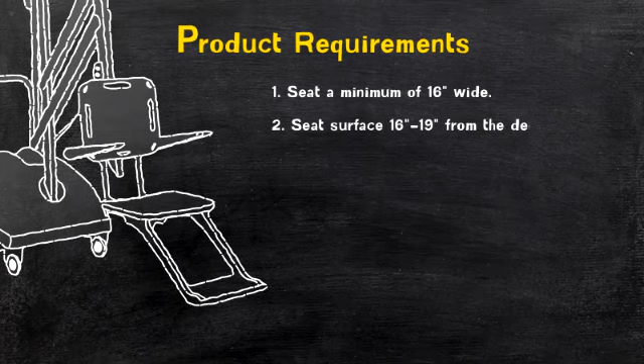Let's look at these requirements a little closer. First, there are the product or P requirements. The seat must be a minimum of 16 inches wide. The seat surface must be between 16 inches and 19 inches from the deck surface. Footrests are required and must move with the seat.

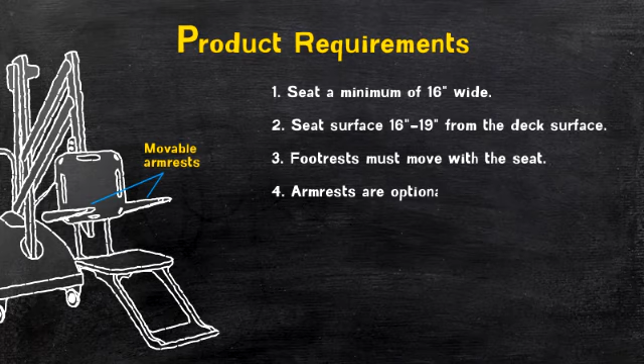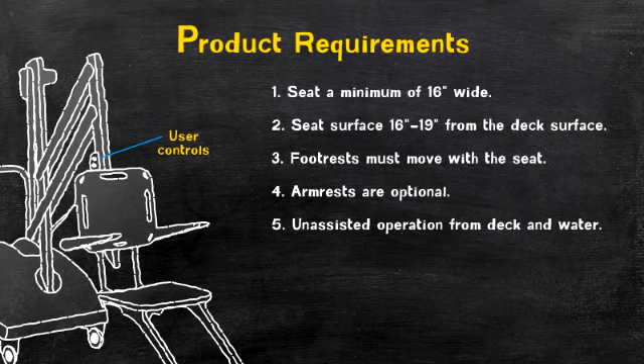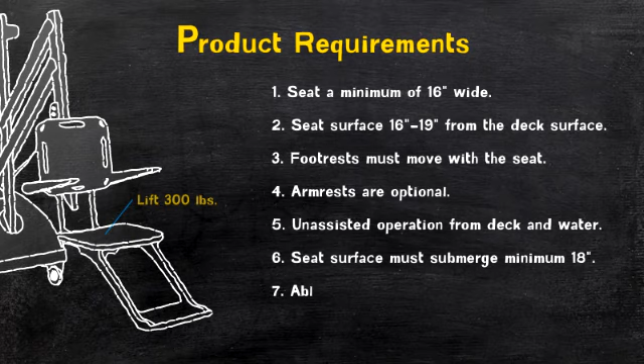Armrests are not required, but if used, the armrest opposite the water must be removed or fold clear of the seat. User controls must allow for unassisted operation from both the deck and water levels. The seat surface must be able to be submerged a minimum of 18 inches below the water line. And the lift must be able to lift 300 pounds. All of these items are required in order to conform to the ADA product design guidelines. But remember, product conformance is only half the equation.

The other half of the equation is I, which represents the installation elements required by ADA. These installation requirements have two parts. First is a scoping requirement that defines a pool's means of access requirements. Pools with less than 300 linear feet of pool wall are required to provide one means of access, and that means can be either a pool lift or a ramp. Larger pools, more than 300 linear feet, are required to provide two means of access.

Second are the application requirements, which define placement and accessibility. These requirements are a major predictor of compliance and an area that is often overlooked. Because each pool is unique, close attention must be paid to placement in order to ensure the product's accessibility. In this area, ADA states that pool lifts shall be located where the water level does not exceed 48 inches. In the raised position, the center line of the seat shall be located over the deck and a minimum of 16 inches back from the pool's edge.

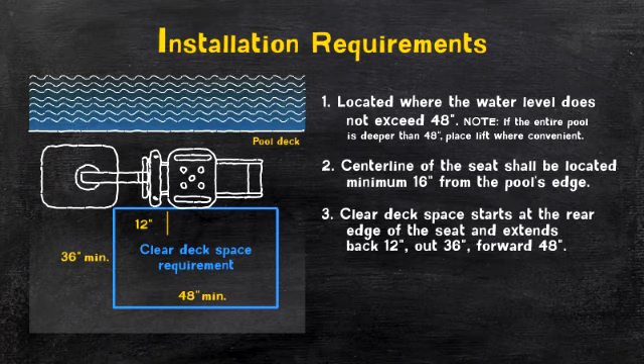Additionally, clear deck space shall be provided parallel with the seat. This clear space starts at the rear edge of the seat opposite the pool and extends back 12 inches, out 36 inches, and forward 48 inches. Now that we understand both elements of our equation, let's take a look at a few real-world scenarios and solve for C to see if we're compliant.

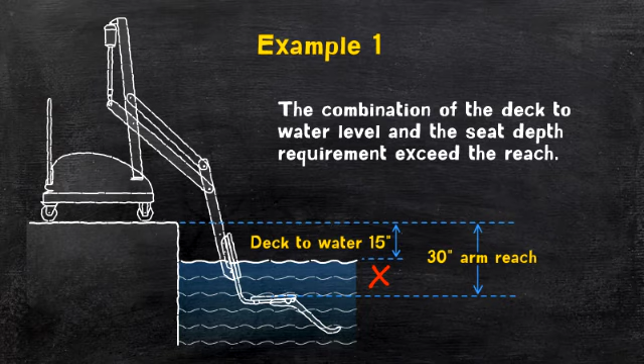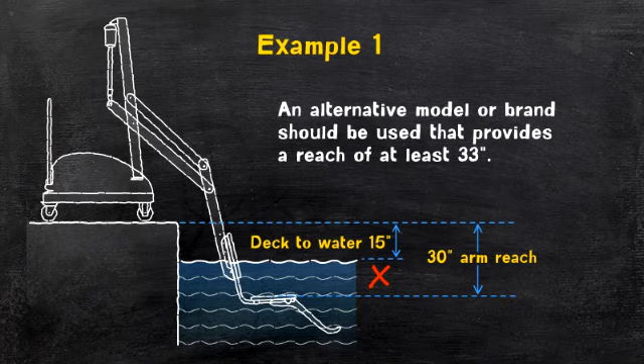Pool lift A has an arm reach of 30 inches. The site has a deck to water level of 15 inches. Can you reach the required submerged depth of 18 inches with pool lift A? If you said no, you're correct. The combination of the deck to water level and the seat depth requirement exceed pool lift A's reach. In short, the arms are too short. In this particular instance, an alternative model or brand should be used that provides a reach of at least 33 inches. This is one example of how site variability can affect compliance. Here's another.

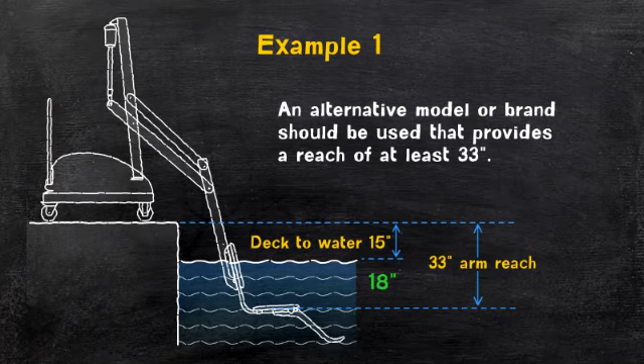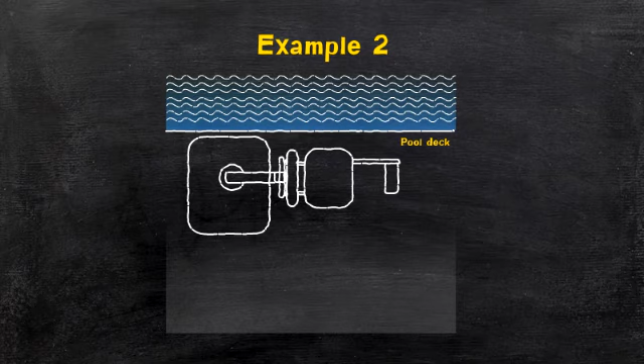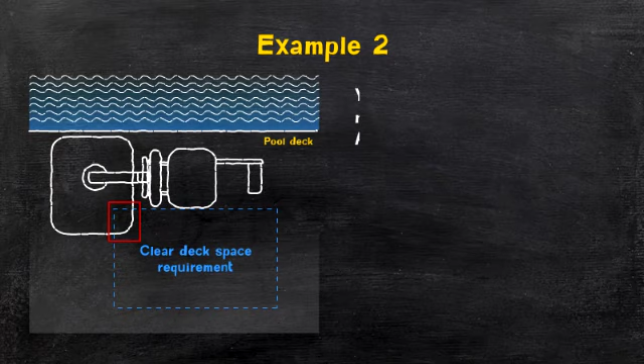Your customer has a pool with less than 300 linear feet of pool wall and requires one means of access. So you choose your favorite brand of lift, identify an area of the pool where the water depth does not exceed 48 inches, and carefully place your lift 16 inches back from the pool's edge to meet the seat centerline requirement. At this point, everything looks good. Next, you check the clear deck space area and discover that a portion of the lift encroaches into this space. What's your next step? If you chose to stop, you're correct. In this particular instance, you should seek an alternative model or brand that meets the ADA installation requirements.

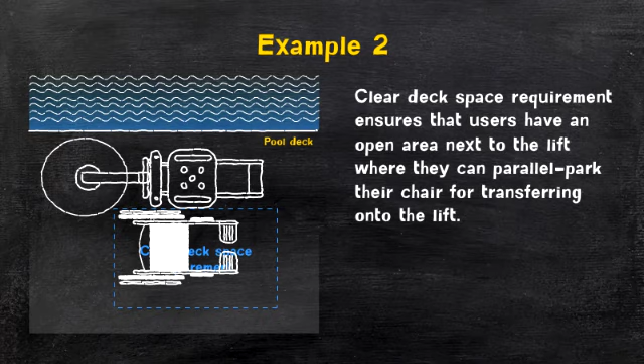The clear deck space requirement is designed to provide an area of unobstructed space starting at the back corner of the seat opposite the pool. This requirement is in place to ensure that the users have an open area next to the lift where they can parallel park their chair when transferring onto the lift. Additionally, this space is important if a user requires transfer assistance. As you can see, the installation requirements can have an adverse impact on compliance even when you use a product that conforms to the ADA product guidelines. Remember, both the product and installation requirements must be met in order to be compliant.

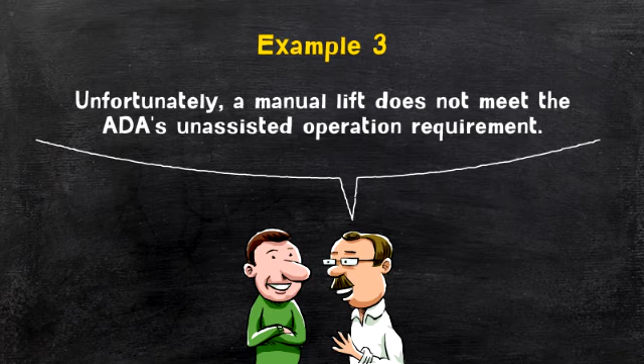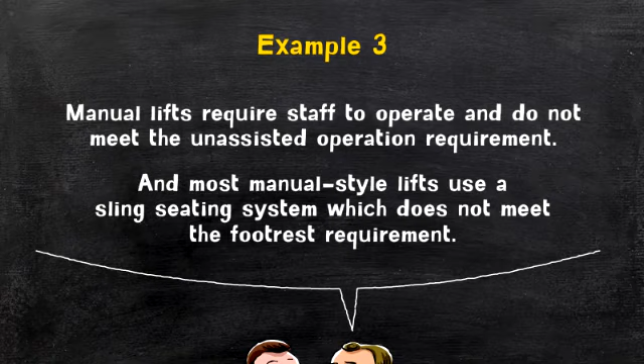And lastly, as you're introducing the new ADA requirements to your existing customer, he interrupts you and states that they are already ADA compliant because they have a manual lift at their pool. What's your response? If you inform your customer that a manual lift does not meet the ADA's unassisted operation requirement, then you did the right thing. Manual lifts require staff to operate, so they do not meet this requirement. Also, most older manual-style lifts use a sling seating system, which does not meet the footrest requirement. Additionally, newer style lifts offer armrests, firm seats, and back and leg support, which help better accommodate people with a wide range of disabilities.

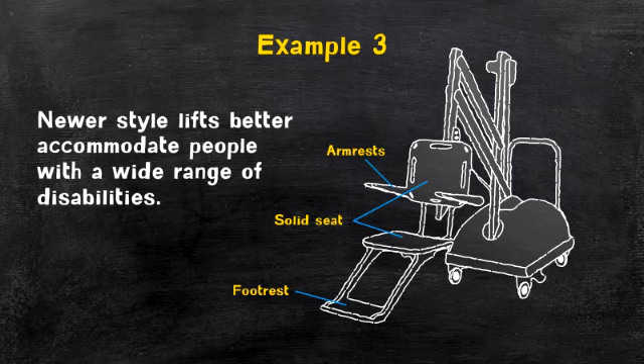To sum up, ADA compliance is a function of a conforming product design that is installed in accordance with the ADA installation requirements. To ensure that your lift meets all ADA requirements, number 1, make sure your product of choice conforms to the ADA product design guidelines. Pool lift manufacturers should be able to produce independent testing results that verify conformance. Number 2, confirm with your installation provider that when installed, your lift will meet the ADA installation requirements.